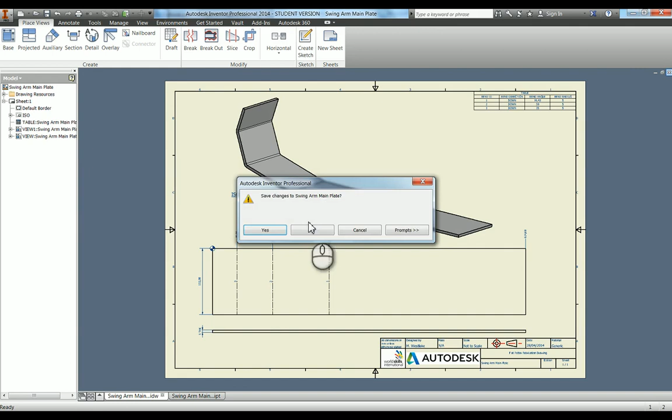If we go to new drawing, of course I've got the sheet metal part open, so when I go to base view it's going to open that part as a default. When you're doing a sheet metal drawing, you get two options here: the folded model and the flat pattern. So first thing we're going to do is the flat pattern first.

So I'm going to put this down here. I'm just going to make it a little larger, change the scale 1 to 2. I'm going to drop that in. I'm also going to bring down a second view in a second to show the thickness.

I'm just going to rotate this view through 180 degrees just so that in a second you'll see when I put the isometric view in, that'll make sense why I've done that. I'm now going to put the projected view in, then we can show the thickness.

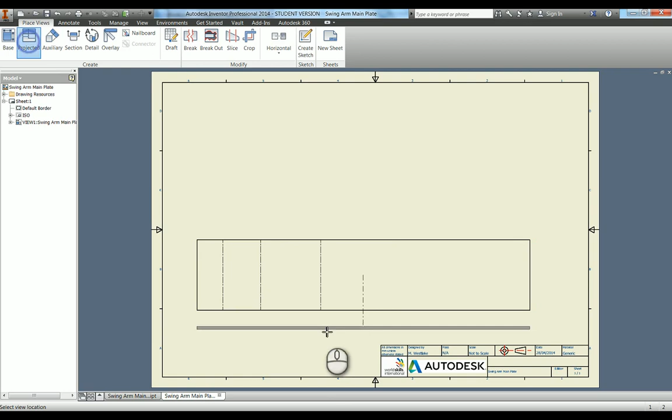So I'm going to add a couple of dimensions to this drawing. First things first, I'm going to do the thickness, so I'm just going to add that note there and just change the tolerance. Also we're going to need to put the width on, so just line those up.

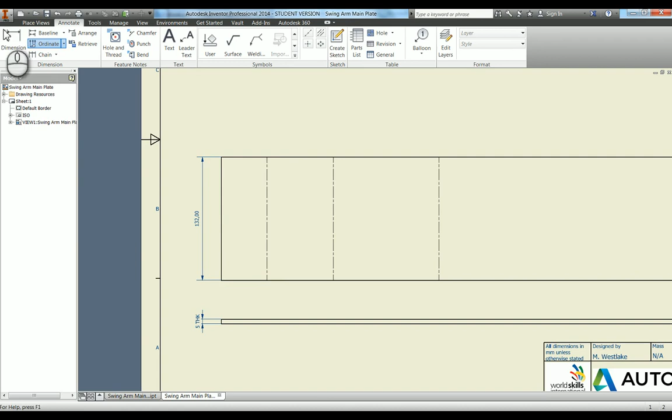Then I'm going to annotate, and I'm going to use an ordinate set of dimensions to do the bend lines. With the ordinate tool, you click on the view you'd like to do it of. You can see the first place I'm going to click will be my datum, and then I go along and select the lines I would like to dimension from that datum, select the last one, right click and continue. You can see it's put all of those in for me. So you just left click to place them, and then right click OK to keep them there.

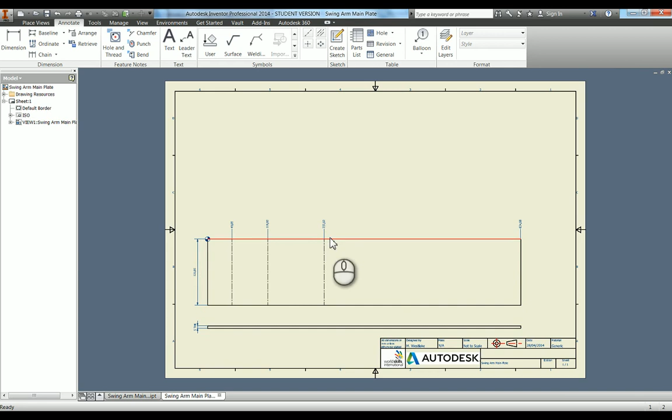So that is basically all the dimensions we need now to get this flat pattern done, except the bend radius and the bend angle. So what we're going to actually do next is up here in table, where you have your parts list, you can do a general table. If you then click a flat pattern view, you actually get a bend table done for you.

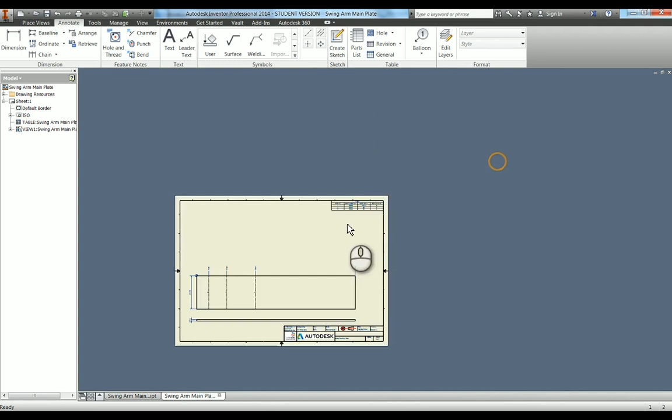If I press OK and just place this in the top, you'll see there that we've got bend IDs. And if I go down here, here's number 1, and you've got 2 and 3 obviously, which are these two labelled. And then you have the bend angle and the bend radius.

So the only thing missing now that the competition asks for is the isometric view. So I'm just going to go back into place views and base, and remember, we can now put the folded model. Now if you do an isometric, I believe it's too big.

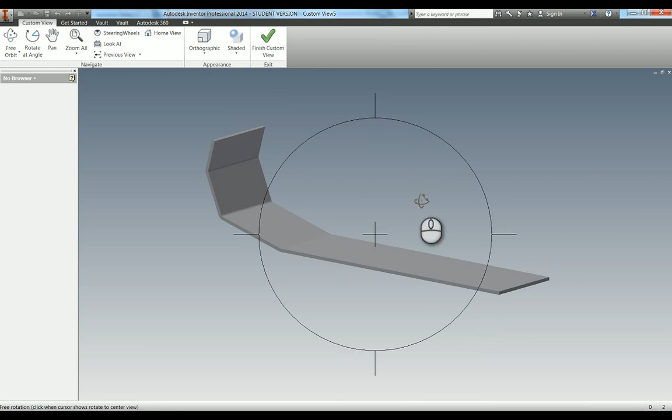So what we're going to do is if you go into this box here, you can actually do a custom view, so you rotate it in the model like so. That should be about right. Then when you've done, you click this green tick, finish custom view, and then you can actually place this view.

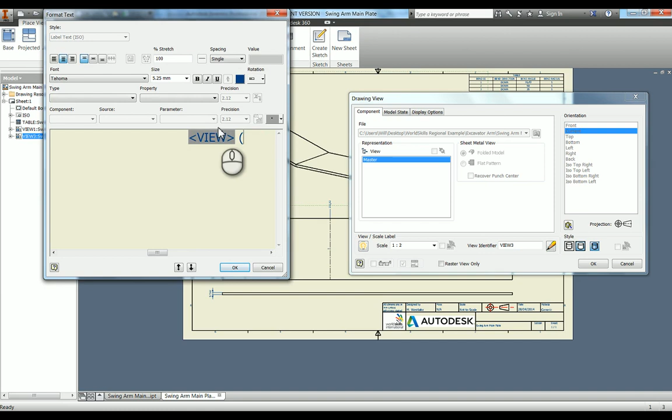Just move these around a little bit just so it looks a bit neater. And I'm just going to add a title to this. Bring that down.

And there we have created enough information to manufacture it. So we've got the thickness, the width, we've got the length, we've got all 3 bends, and then we have our bend table up here.

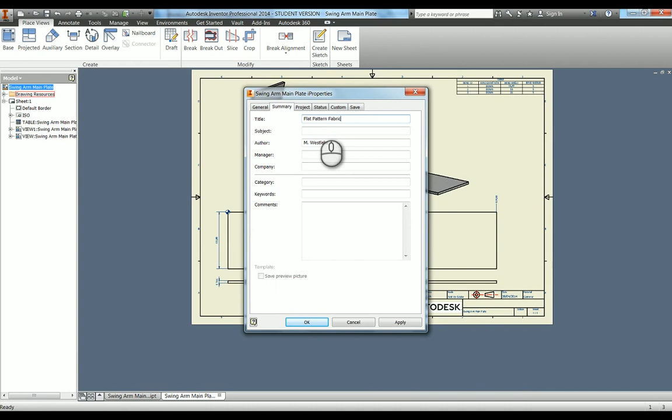So the last thing for me to do is just to give this a title. So, flat pattern fabrication. And then if you wanted to save this as a PDF as well, just so you're aware, you go to save as, save copy as, and then you can go into here and select PDF.